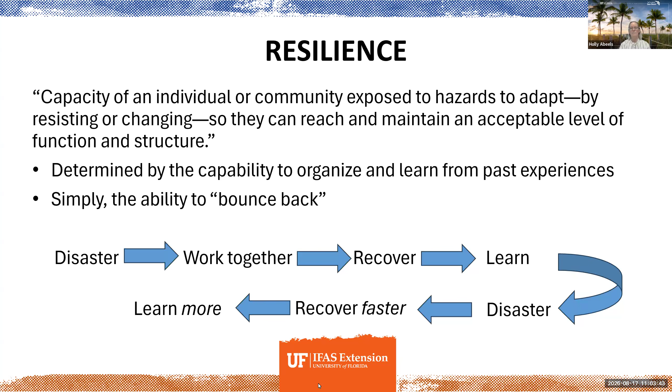So we've already learned a lot in this series about ways that you at home can adapt and be more resilient, and also how your community can be more resilient. And Eban today will be talking quite a bit about that community portion, as well as some of that individual resilience. Thanks so much, Holly.

So I wanted to start out kind of building off of this great series that you all have put together, really talking kind of what are we talking about in the scope of community resilience and individual resilience here. When we think about community resilience as it pertains to gray infrastructure and stormwater management, we think about sort of the roads and bridges that help us be able to move around in our communities. We think about functioning and drainage of our stormwater system so that it's able to move water out so that we don't have flooding. But there's also sort of the individual resilience as well.

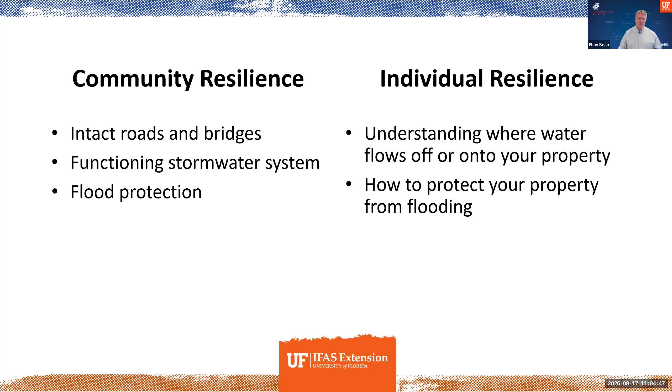And this is really understanding sort of from your own property perspective, how water flows onto or off of your property, and also how to protect sort of your property from flooding whenever we do have sort of large rain events.

So to start off kind of going into this whole aspect of gray infrastructure, really thinking about sort of the basics here, and some of you may be kind of familiar with some of these concepts, but looking at sort of what happens when we change an area from basically undeveloped, maybe it's forested, maybe it's an ag field, and then making that into an urbanized or developed area. There's several things that really kind of occur.

And just to point out here, the graph that I'm showing here, the blue bars represent the rainfall that happens during what we call a center weighted storm, but basically it gets more and more intense and then tapers off, like many of the storms that we end up having. And then the lines that are shown there for undeveloped and urbanized are the rate and sort of the amount of runoff that occur. So the shift from the undeveloped to urbanized is what we kind of want to look at here. And what you should see, hopefully, is a couple of things.

Number one, there's a greater total runoff volume from the urbanized compared to the undeveloped response to that rainfall. There's also a shorter time to the peaks. So if you look at where the undeveloped and urbanized peaks kind of happen, the urbanized peak happens much quicker after the peak rainfall than the undeveloped. And that's due to the stormwater infrastructure optimizing the conveyance and movement of water from where it becomes runoff to the downstream area. And so this is where we get the term sort of flashier or flash floods that occur.

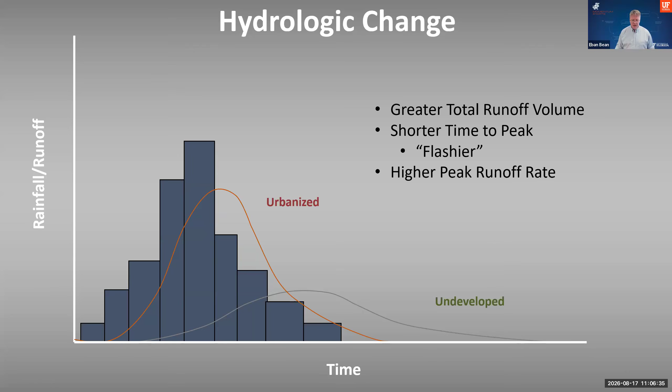And then there's an overall higher peak runoff rate. And so that can introduce risks of flooding downstream, particularly if many areas are contributing at once. And so I mentioned before that a lot of our drainage network is essentially about getting water from where it becomes runoff downstream and offsite.

And we have really kind of taken that approach really up until kind of the 70s and 80s, that it was really about just getting that water offsite as quickly as possible so that we're not flooding ourselves and our own property. But municipalities built these storm sewer systems to drain usually to the nearest creek, river, or wetland or pond so that we could not have flooding on our property.

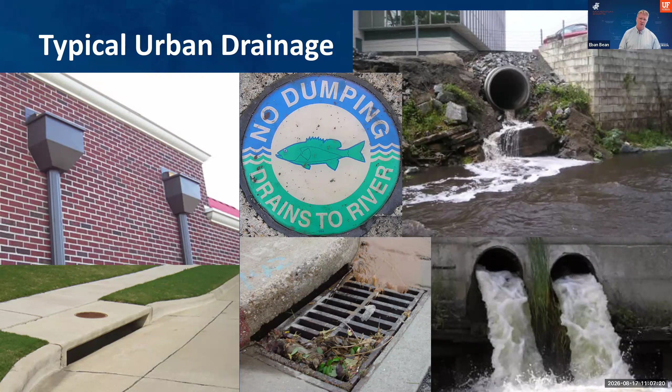And you can see sort of the different elements in the urban area. We have scuppers on the side of buildings. We have storm drains along the side of streets. And then we have the pipes where they discharge into those downstream waters.

So around the 70s and 80s, we realized that all of that water contributing downstream as quickly as possible and flooding out people downstream is maybe not the best or most responsible way to manage stormwater runoff. And so along came an approach called peak control.

And this was essentially the idea that instead of just allowing all that increased amount of runoff to go off-site and downstream, we should capture and control the release of that stormwater runoff so that it is comparable in some ways to what happened before the area was developed. So essentially, with detention, we basically have these ponds where runoff is directed, fills up a pond, and then slowly discharges it downstream. So it reduces the peak rate.

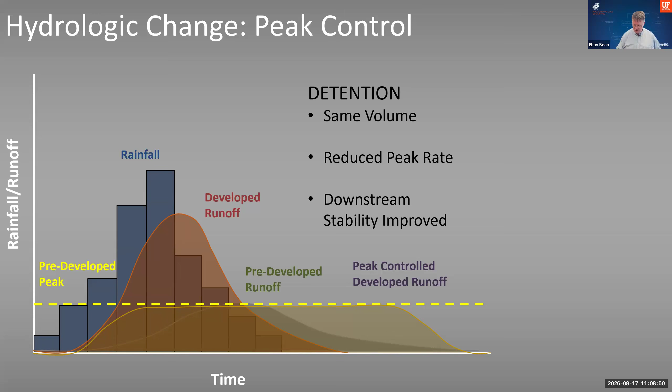It's the same amount of volume, essentially, that goes downstream, but it also prevents downstream erosion or reduces the likelihood of that. And so this yellow dashed line indicates that pre-developed runoff peak. And so what we've done with the modified or peak controlled runoff is stretch that out. And so you can see that orangish yellow at the bottom that's just hugging underneath that yellow dotted line.

The water quantity is not the only issue with stormwater runoff that we have to deal with. I'm sure many of you are aware of the impacts of water quality from stormwater runoff. A lot of our developed areas, like our roadways, contribute metals, polyaromatic hydrocarbons. Our parking lots and other impervious surfaces can contribute organic debris, sediments, and nitrogen that gets deposited just from the atmosphere. Then we also have management of landscapes. If we're not applying nutrients properly, then those can be sources into our stormwater system and move downstream.

They are essentially walking, barking point sources of pollution. And so it's important to pick up after our pets to prevent the introduction of nutrients as well as pathogens into the flow path that contributes to our water bodies.

And if we look at the impacts of chemicals or pollutants in stormwater runoff and the overall quantity of runoff that's coming off the landscape, we can have some pretty significant impacts. Everything from algal blooms that contribute to fish kills to downstream flooding that is still a significant occurrence in many areas.

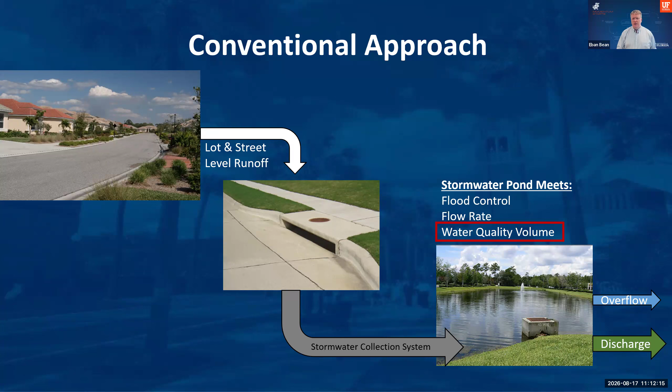It also reduces the flow rate and reduces the risk of that erosion. And there's also a water quality volume where there is credit for the treatment and removal of nutrients. One of the big aspects, though, of water quality volume is that the intentions behind this were good. However, in Florida, we found that these stormwater ponds are not necessarily providing the amount of treatment that they are credited with.

Now, there's a reason that phosphorus is better removed than nitrogen. One of the aspects is that stormwater ponds in this water quality credit were based on stormwater ponds being able to remove sediments. So if you think about water that's moving and has sand or silts or other particles in it, it's moving quickly. It can carry a lot of sediments with it because of that momentum. When it then goes into a pond, the velocity stops and those particles can settle out pretty quickly from the suspension. And so you can get pretty effective removal of sediments.

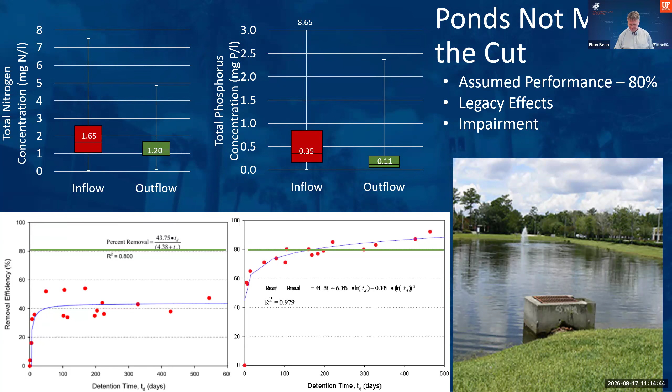And this has created a stormwater legacy, right? Where we put in this stormwater infrastructure, it's credited to treat our water quality. And so that's kind of set in stone. It's hard to go back and correct or fix that, particularly when there's limited land in these areas that have been developed. There's limited areas to work with to improve that. And this is where low impact development and green stormwater infrastructure come into play.

And if you're not familiar with these terms, I want to give you some basic definitions to think about them. If you have heard of them before, you might think of them as the same thing. But I think these definitions really distinguish them from each other in how they apply to different phases of the development process.

So low impact development is a comprehensive site planning and design strategy for maintaining the pre-development hydrologic regime. So basically trying to have the same or similar response to rain events for a site before and after it is developed. And this also focuses on mitigating the pollutants from land development using distributed structural and non-structural design techniques. But the goals here are to avoid and minimize the runoff being produced from the site. So a lot of this is looking at how do we minimize the impervious, and then how do we reduce or infiltrate any runoff from those impervious areas very close by, just by disconnecting impervious area.

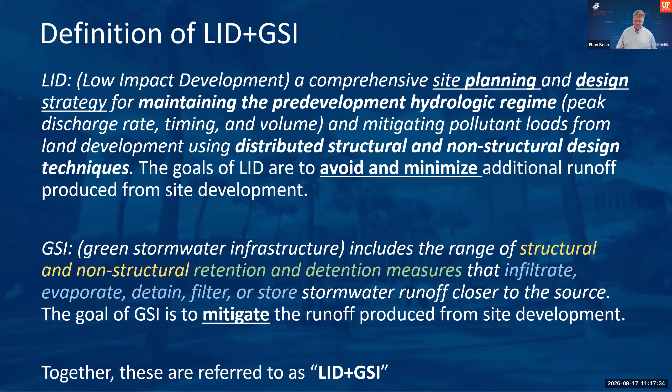I really like this figure. It's from a manual from the University of Arkansas, and I think Carrie can put a link in the chat to where you can find this manual.

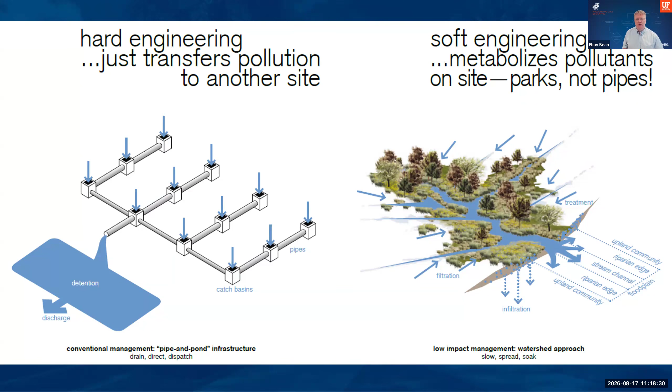But one, I think it provides a really great comparison between our approaches, how they've evolved from initially being this hard engineering pipe and pond, just relying on concrete structures and then detention basins and then discharging, to more of a holistic integrated LID GSI approach where we really try to think about how do we integrate natural processes into the built environment and provide filtration, infiltration, and treatment of stormwater along its flow path.

This is the manual I was talking about. I really like this. It's just such a great graphical illustration. I'm a stormwater nerd, and my family is not very interested in the things that I find really exciting. But this is a manual that I think of as the coffee table book of stormwater management. It's just so graphical.

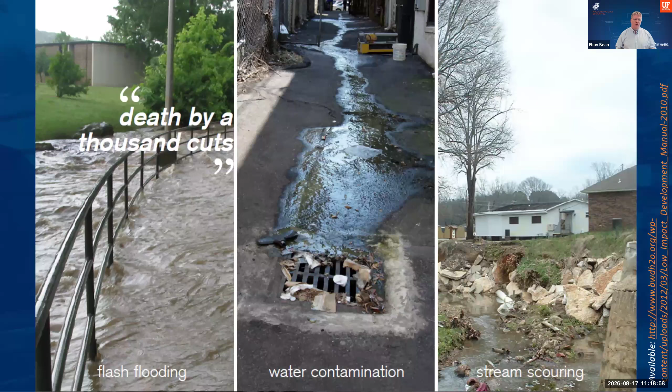It provides such a visual representation of a lot of the things that we're dealing with. And if you go to the link that's here or that Carrie provides, you can see some more excerpts of it. It's really fascinating. They do a great job of kind of laying out some of these concepts and really providing an easy way to understand these.

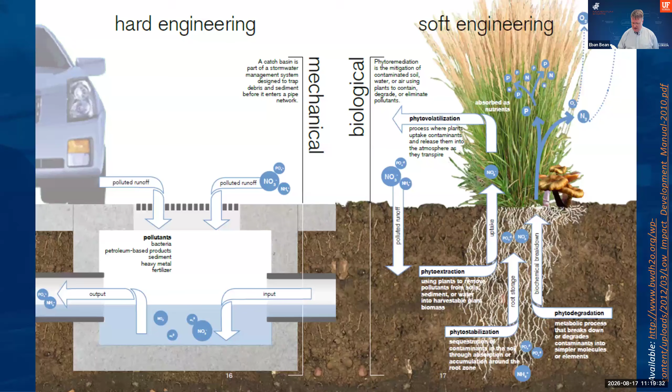Really even breaking down a lot of these more complex processes of how do pollutants come in, what pollutants are coming in, inputs and outputs, how do plants approach that and help to filter it. And then it brings it all together into some of these examples of how these processes can be integrated into the modern built environment.

And so I kind of alluded to this a little earlier, but this kind of graphic shows really the transition from site planning to mitigating here, where we talk about, at the front end, the LID takes place with avoiding runoff. So what this means is essentially identifying the areas on the site that are valuable natural infrastructure to preserve those so that we can retain those hydrologic features and retain that large scale hydrologic performance.

Now, with development, there are some areas that do have to be converted to impervious surfaces for different types of structures and so forth. But with LID, we look to minimize the generation of that runoff, limiting the footprint, disconnecting impervious surfaces. So you don't have a rooftop flow draining to a gutter that goes onto a driveway, into a street, and then into the storm drain. It can run off into the landscape, whether that's turf or some other type of natural area, so that it is infiltrating and being treated on site rather than just contributing downstream.

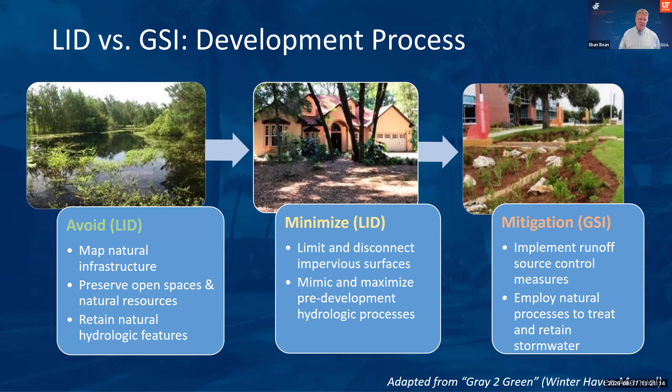And then again, anything that's not able to be addressed or mitigated is addressed by green stormwater infrastructure, by implementing these source controls and really looking at how do we integrate these natural processes to treat stormwater runoff.

So going in depth a little bit more with this whole avoid aspect and the planning, it really starts at the planning stage. To go in a little bit more detail here, number one is preserving those open spaces and natural areas as much as possible. With development, you're not going to be able to preserve it all, but there is value to preserving as much of that as possible. Maximizing the retention of native forests and preserving those permeable native soils that really promote infiltration and filtration of that water as it goes into the ground.

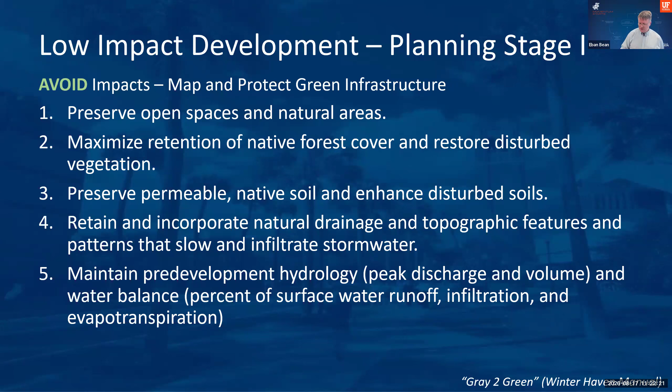You also want to incorporate those natural flow paths and protect the topographic features that essentially slow down water as it moves across a landscape so that it's not just moving from one point to the next as efficiently as possible. Slowing it down also allows for it to be filtered and infiltrate into the ground. And then again, we're trying to reach this aspect of maintaining that pre-development hydrology, mitigating those peak discharges and volumes, and so forth.

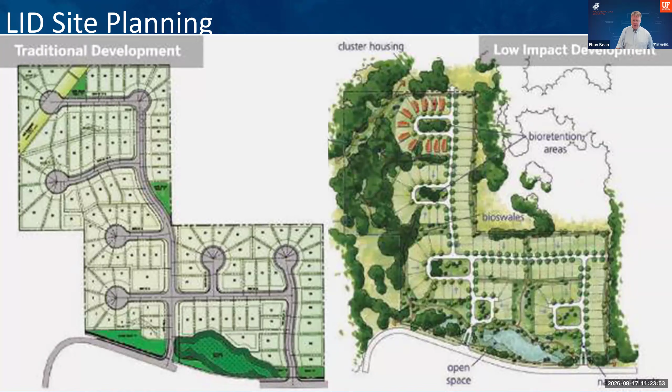Another example of this is a site that was designed for a neighborhood called Restoration. And this was in a plan for East Central Florida. They started out initially with the plan on the left, and there were a lot of wetlands and forest that were going to be impacted. And then they came back and were encouraged to try to take a more low impact development approach and limit the amount of impacts on the area to the west side or the left side of the map here.

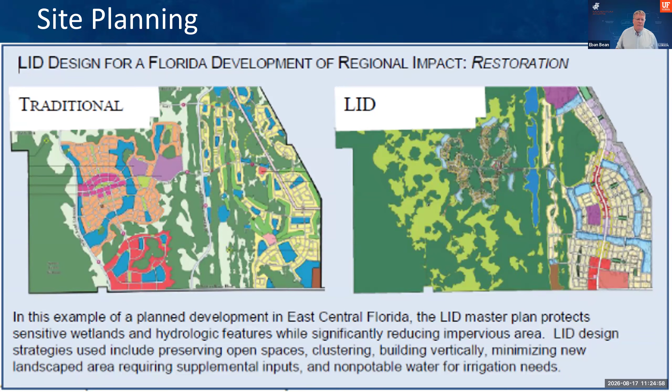And they were able to basically cluster all of the development, same amount of square footage and area, in the right-hand side here, basically limiting the amount of imperviousness, reducing drive times, increasing the building vertically, and reducing the amount of urban landscape areas that needed to be managed on a regular basis. So as we go into phase two, the second stage is now minimizing.

How do we basically make the project fit the site? A lot of times we see that we want the site to fit the project. We have a project in mind and we force it onto the site. It's where you see sites that are cleared and mass grading done where they recontour the entire site. We'd like to move away from that and really make use of what the existing topography of the site is and what those features are.

So this involves minimizing and disconnecting those impervious surfaces, trying to control runoff at the source, using those small distributed hydrologic controls. These are green stormwater infrastructure I'll talk about more in detail in a minute. Looking at more redundant runoff controls, so not just relying on one type of practice, but multiple ones. Really thinking about the whole water cycle, so maximizing infiltration, evapotranspiration, the filtration and storage of stormwater throughout the site.

We also want to reduce our over-reliance on traditional stormwater conveyance and pond technologies. We want to slow the water down by creating a rough hydrologic landscape so that water doesn't move super quickly. That rough hydrologic landscape allows water to infiltrate and be filtered. And then employing natural processes for water quality improvement.

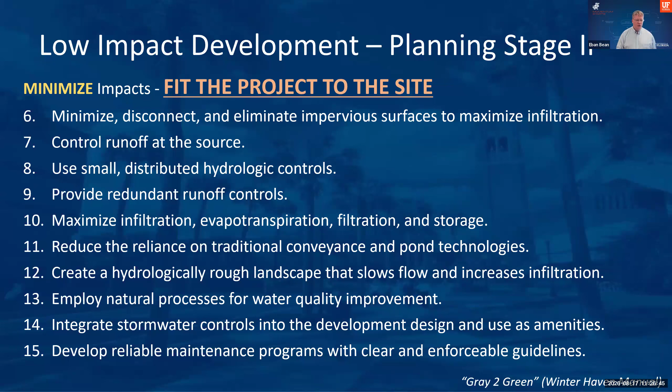And then building off of that, integrating those stormwater controls into the development design as an amenity. A lot of times these areas provide a lot of value, whether it's shade trees from natural areas that are preserved or recreational areas. And then we're developing reliable maintenance programs that ensure that these practices continue to work and continue to provide their services.

So when we think about limiting imperviousness, this is really about how do we reduce the amount of impervious cover. Some of that is looking at narrower streets and using swales. Narrower streets automatically slow the velocity that people are willing to drive, because if you've got a smaller space, you don't want to be flying down and having somebody come within a couple feet of your car. You naturally want to go a little bit slower.

We can reduce the length of driveways, particularly if we're clustering homes together. It doesn't seem odd to have shorter driveways when we're in a tighter community. And then there's the aspect of just reducing the size of lots. And instead of only going with single story, we can go to multi-story to reduce the housing footprint.

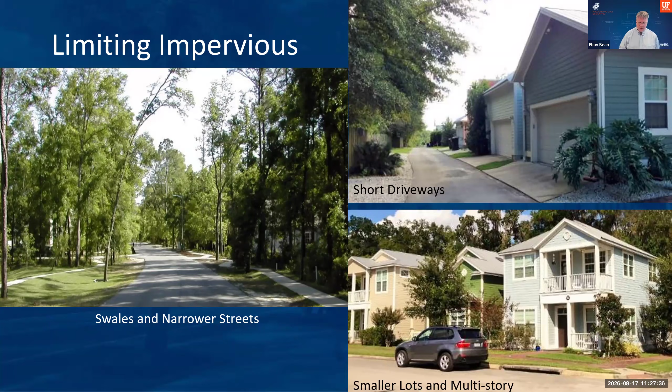When we think about disconnecting imperviousness, this is really about how do we put spaces adjacent to where stormwater runoff is generated, like in a parking lot or on a roadway, where that water can run off, build up, infiltrate, and potentially, if there's enough water, then discharge somewhere else. But this allows for pre-treatment of that water that is coming off of those roadways.

And I'll talk about this a little bit later on, but there's an aspect of what's called the first flush, that first little amount of water that comes from these afternoon thunderstorms. Most of the pollutants that come off of our impervious surfaces are washed off in that first amount of rainfall. Usually we say it's about the first inch. So if we can capture and infiltrate that first inch, we can really reduce the amount of water quality pollutants that are going downstream.

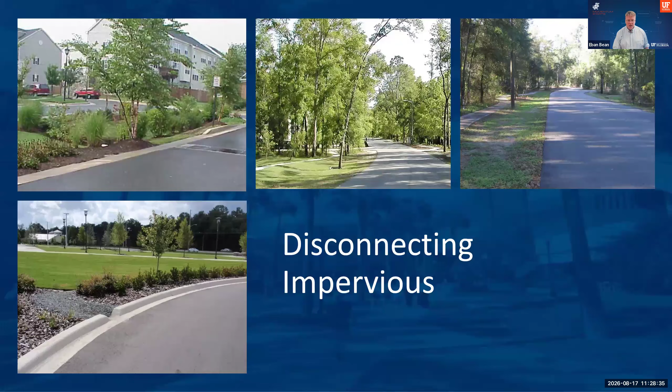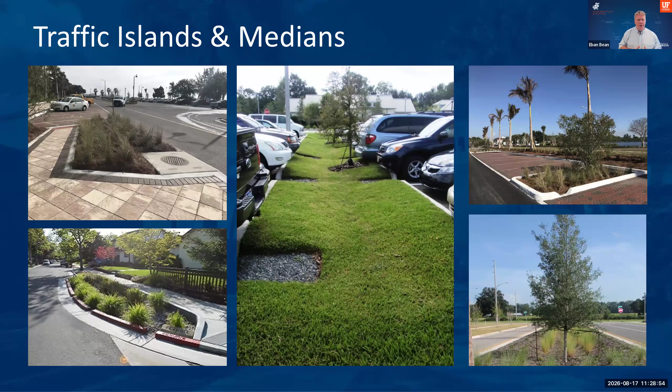Other opportunities to disconnect imperviousness are to make the traffic islands, instead of mounds, depressed so that they can receive runoff from the adjacent parking areas and roadways. This allows that water to build up in these open areas of the parking lot and then infiltrate into the ground.

And then moving on to phase 3. So once we've basically tried to mitigate, avoid and minimize the runoff from the site plan as much as possible, then we look for where we can incorporate green stormwater infrastructure into the landscape to mitigate the runoff that could not be avoided or minimized.

And there's a lot of different names up here. I'm going to go over these in a little bit more detail, but things like green roofs, pervious paving, rain gardens or bioretention, wetlands. Stormwater ponds are a type of green infrastructure. It provides its own types of benefits, mostly on flood control, okay?

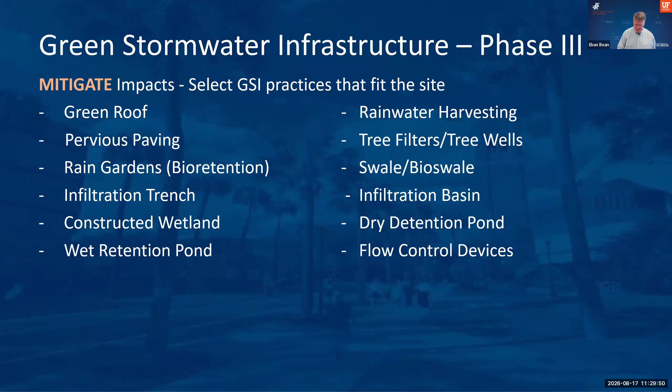But it is a type of green infrastructure. We also have things such as cisterns and rainwater harvesting, tree filters or tree wells, and other types of practices. So what does the conventional kind of orientation or configuration look like within an LID GSI approach?

Well, we still have the issue when we have development of having to mitigate or control for flood. That flood control is not going away, right? We're still going to have to protect property and the public from the risk of flooding when we add imperviousness to an area.

Instead of that water essentially going off of the individual lots and then directly into the storm drain, we look to capture that water, infiltrate it, treat it before it then either overflows or maybe it's being filtered as it moves along. That water quality aspect is happening upstream of it entering the stormwater collection system. And so this looks like having rain gardens and cisterns and other smaller practices within the urban landscape, right?

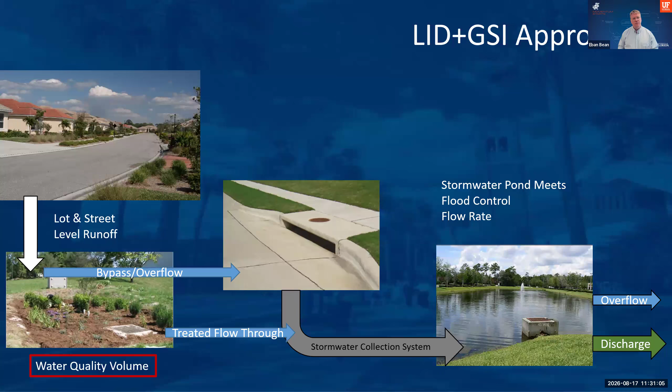So instead of the stormwater pond being relied upon for flood control and water quality, it's really just being relied on for flood control, and our water quality is really being addressed in the landscape. So let's look at some of these practices, and some of these you may be surprised to be somewhat familiar with. So cisterns, these are an extremely old technology. They've been used for thousands of years.

In many places, they were being used for water supply. And here they can kind of offset some of our water uses, but really as a way of capturing runoff and not letting it discharge off site. So these cisterns can either be above ground or buried below ground. And they essentially fill up during rainstorms. And usually it's getting direct runoff from a rooftop.

And then the recovery of that volume is done through non-potable use, you're not consuming this water, but it's used through irrigation of the landscape, maybe vehicle washing or flushing of toilets. Now, if you have a rain barrel or you've seen one, those are essentially just small cisterns that are scaled down to maybe an individual roof downspout.

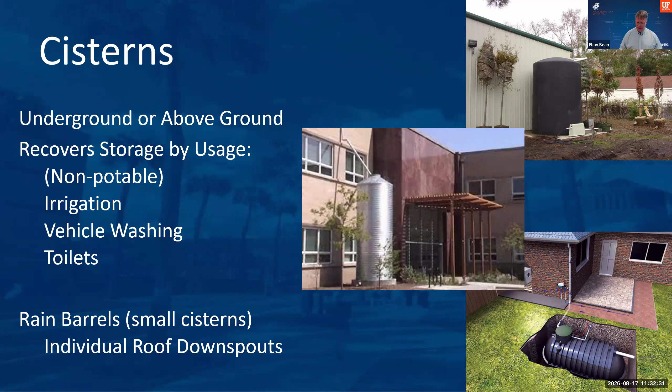The key here with the operation of cisterns, though, is that it only can reduce the amount of runoff that it has storage available for. So it's important that in between rain events, it's able to draw down or recover that volume so that it has enough capacity when the next rainstorm happens. So it's important to make sure you're using that water on a regular basis.

Stormwater planters are another type of technology. These basically reduce runoff and they treat the runoff as well. I'll talk a little bit more in detail about what bioretention is, but this is sort of bioretention in a box. A lot of times these are right up against the building, between the building and the sidewalk rather than between the sidewalk and the street. So it's almost like integrated into the building infrastructure in some ways. But it can definitely take that roof downspout, the water that comes down the downspout.

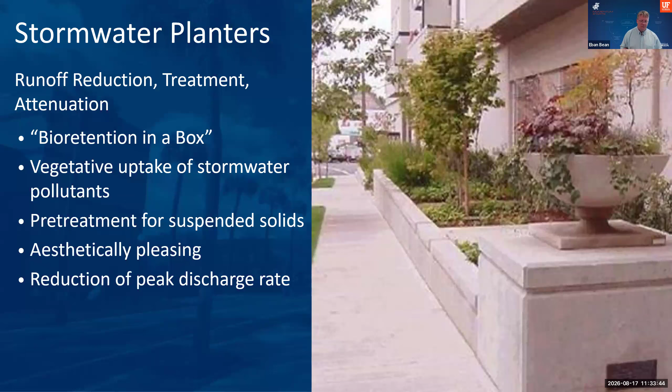And these basically recover the volume through vegetation evapotranspirating, or basically taking up that water and using it as it fills up that area. And it's very effective for removing suspended solids that might clog other things downstream. If you weren't using this as a stormwater practice, this might just look like pretty landscaping. So these can be fairly aesthetically pleasing. We're just, with some additional thought into the design, incorporating this function of treatment and runoff reduction. So it can really provide some of those functions.

Permeable pavements. These are one of my favorite practices. When I got started in this field, oh gosh, maybe 20 years ago, I did some of my first research on this. And permeable pavements are really interesting because unlike the conventional types of pavements, it allows water to drain through this material. So you have porous asphalt and pervious concrete and pervious pavers or concrete pavers.

And while the surface is a little bit different, the composition or the profile is pretty similar across those. You essentially have this pervious surface that allows water to quickly infiltrate whenever we have a rain event. And then it flows in and fills up these rock layers underneath that are about 40% void space. And so water moves in very quickly, fills this up, and then in between storm events, it slowly infiltrates into the soils below.

Now, if we don't have great soils, we can put in an underdrain to allow that water to move downstream into the stormwater system. But typically here in Florida with our well-drained soils, if we have enough separation from the water table, that water will just infiltrate into the ground below.

Now, one of my favorite analogies of being able to tell the difference between these and the conventional asphalt and concrete: porous asphalt, it's really difficult to be able to see what the difference is. You really got to know what you're looking for to be able to see it. But pervious concrete, the best way to understand what that looks like is it's essentially a Rice Krispie treat. And if you think about how Rice Krispie treats are made, it has a very similar structure.

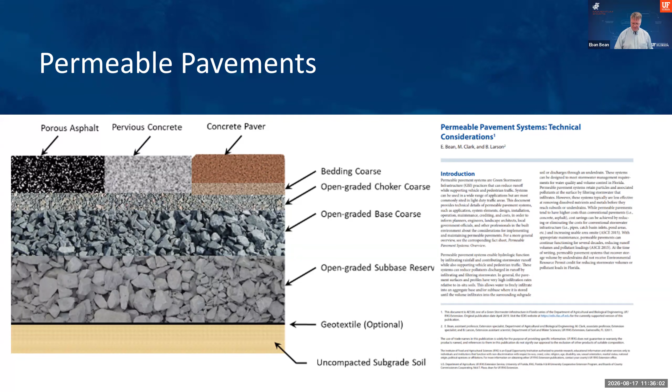Moving on to bioretention or rain gardens, the real difference between bioretention and rain gardens is that an engineer designs a bioretention to meet certain performance standards. A rain garden can be basically constructed by anybody in their yard on the weekend very quickly. Essentially, these are vegetated depressional areas where stormwater runoff is collected and allowed to infiltrate either into the ground or taken away with an underdrain and directed into the storm drain system. Either way, the bioretention media, the soil there and the plants help to improve the water quality, filtering out particles and pollutants as the water goes into it.

Now, we typically have a depth of about 9 to 12 inches, and we don't want to go much deeper than that because we want this to be able to drain within about 24 hours. You don't want these becoming ponds that maybe attract mosquitoes or anything like that. So ensuring that we don't have too deep of water and we have good conditions ensures that these will drain within that amount of time.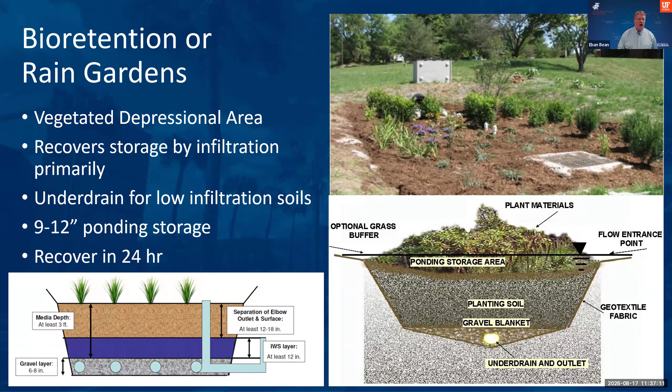Infiltration trenches or dry wells are another practice. If you have a septic system and you're familiar with how those work, they're not too different from essentially the drain field. We route the stormwater into a long pipe that is pervious or permeable and allows water to drain out to the sides. And there's rock around that to keep sediments from the surrounding area from migrating in and clogging. That water flows into that pipe, flows laterally, fills up the stone, and then slowly drains into the soil around it. Really important that we don't have sediments coming into these because sediments can clog this.

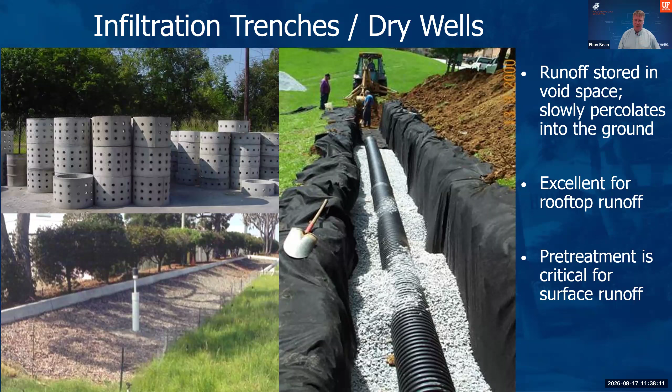So really what we're looking at here is a lot of times roof downspouts. And if there's any type of leaves or anything, we've got a screen in there to keep that out of the pipes. So it's pretty critical to have pre-treatment.

Then swales are great. They provide a lot of function. They provide conveyance, moving water from one location to the other, but they also can reduce the amount of runoff by infiltrating through the soils. And even if those soils are not very permeable, the flow through the vegetation can help with treatment of the water quality from runoff.

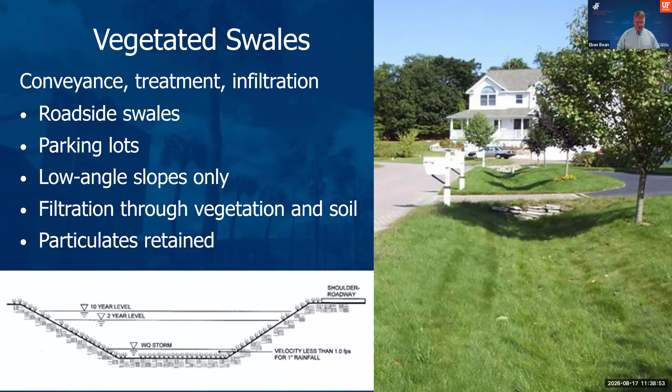And so you see these on the roadsides. You'll see them adjacent to parking lots. They typically have very low angle slopes, so they're not very steep. They're fairly shallow, easy to mow and maintain, and they do a great job with retaining sediments.

Now, a more mechanical or engineered system that I'm including are what are called nutrient separating baffle boxes. They're not necessarily using soil and the natural system, but they do provide some pretty important functions in a situation where we don't really have another option to do the same thing. You have stormwater coming in, and usually you put this in the middle of a stormwater pipe.

So you have water that's coming in, you take out that section, put in this box, and it allows for sediment to drop out of suspension behind these different baffles at the bottom. So you see sediment all along the bottom there. And then it has a screen at the top to capture any kind of floating debris, like vegetation that can have nutrients in it, and other debris that can be transported downstream.

And so then you open these hatches to maintain it. You take out what's on the screen, then you suck out the sediment, and then it's ready to go again. So it's really in a very small footprint, and it removes debris, sediment, particulates, oils, and grease, and it's pretty straightforward to maintain.

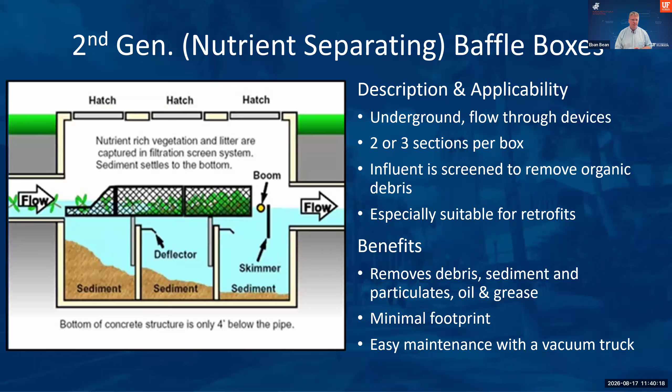Now, in thinking about which options do we go with, a lot of times when engineers are thinking about what kind of treatment do we want, we often want to think about what are the processes, or what do we want the processes to be to achieve the nutrient removal.

When we think about nitrogen, I talked a little bit about this before, where about half of nitrogen is in a particulate form. So the sediment, settleable, and suspended fractions here on this graph on the left, those particulates can kind of fall out. Think of that as being like leaves and other sticks and debris.

There's nitrogen in there. But then there's the dissolved fraction of nitrogen that is the green here, the organic, the NH4, which is ammonium. And then we have nitrate and nitrite at the top. And so oftentimes with our GSI, we want to facilitate the right processes to remove or transform the types of nitrogen or the types of pollutant that we have to effectively treat the water.

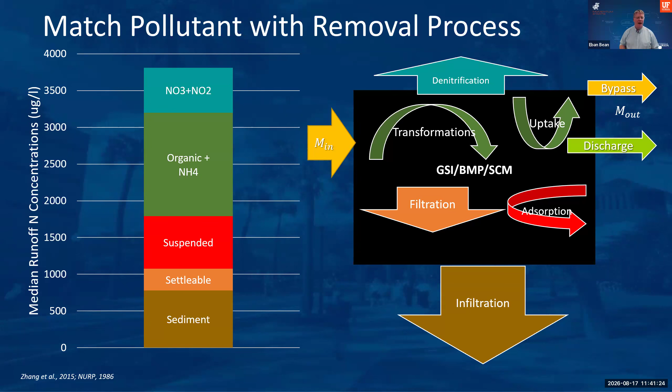And so this is another figure from that University of Arkansas manual. One way to think about this is that there's a range of options along a mechanical to biological axis, and then there is an axis of increasing level of volume reduction, right? So we go from very mechanical on the left, where we're looking at underground detention, oversized pipe, flow control, really just looking at the

volume control and how water is moving through, all the way till we start seeing more biological functions integrated into these practices. Things like vegetated roofs or green roofs, even vegetated walls, permeable pavements, rain gardens, infiltration basins, where we're starting to integrate much more of the biological functions.

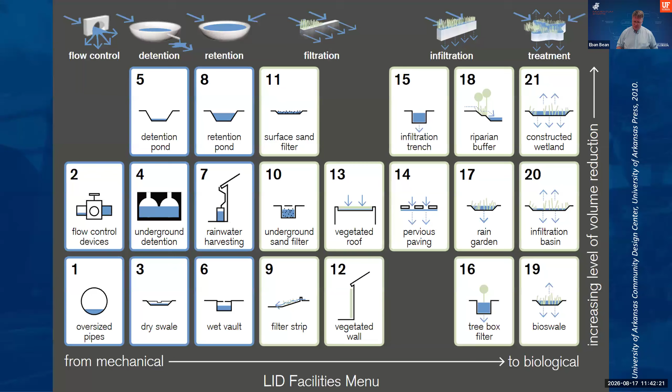When we think about some examples where this has been implemented fairly successfully, I've used this example for a long time. And full disclosure, this is not in Florida, but I think it provides a really great example of where they really went back and thought about, what can we actually do here with this site, and what are our options to still maintain what we have as a vision for this site, but also integrate stormwater management more effectively into the site.

And so on the left, you see this is a townhome development, Winterberry Road. And initially, they had essentially done the conventional approach where you have conventional pavement. The runoff went into these storm drains or catch basins that were then piped from all over the site into two stormwater ponds there in the top center and the upper right.

But what they did when they went back and revisited this was they started thinking about, well, all that pavement, maybe it doesn't need to be impervious. We could probably use porous pavement. And these catch basins, what if we use swales instead of stormwater pipes and tried to infiltrate this, and incorporating some drainage infrastructure?

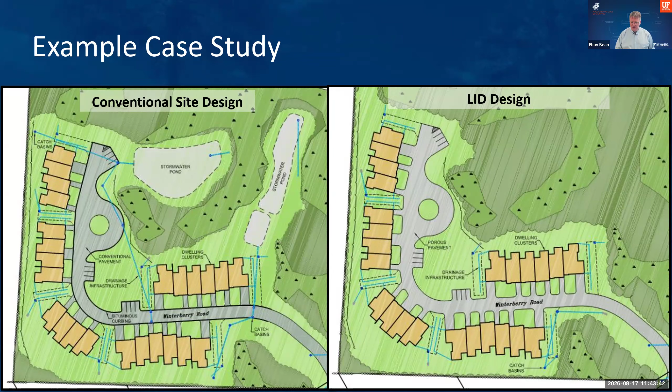And what they were able to do with this redesign, we don't always think about the indirect benefits of reducing the amount of runoff. For example, permeable pavement is more expensive than conventional pavement. But if you think of it just in that context, oh, the permeable pavement's more expensive directly 1 square foot per 1 square foot compared to conventional pavement, you're not really seeing the big picture.

By redesigning this and accounting for the reduced imperviousness, they were able to reduce 1,600 feet of curbing, eliminate 785 feet of storm pipe, remove 8 catch basins. They didn't have to construct and buy the land and grade those 2 detention basins. They eliminated 2 outlet control structures, and they eliminated 1.3 acres of land clearing. So on a $4.4 million project, it may not seem like much, but they got a lot more function out of this and saved $50,000 on the overall project.

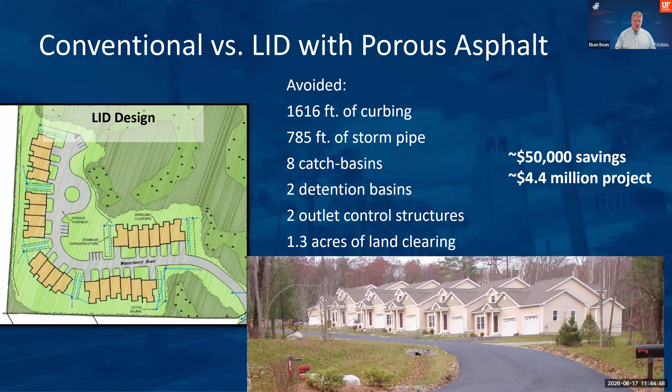So some things to think about with the summary here. Number one, when we think about LID and GSI, getting that implemented into a site really starts at the beginning. We've got to think about the site layout. How do we avoid and minimize the stormwater runoff that's going to be generated? How can we disconnect the impervious cover? Are there ways that we can eliminate curbs and gutters?

In many communities, there's a requirement for curb and gutters, which essentially prevents the use of swales. So you're basically forcing the roadways to be directly connected into the stormwater system. There's some benefits to that, but it's not necessarily one-size-fits-all, particularly in smaller neighborhood developments. And then using a compact design to reduce the footprint and area of disturbance. And then finally, really thinking about how do we make the project fit the site?

How can we modify the project and make the project flexible so that it fits what the site offers rather than the opposite there?

I want to go over a few resources if you're interested in this and want to learn more. First, we've got a video series that myself and Dr. Mark Clark put together. There should be a link in the chat that I think Carrie's going to put there. We go in depth on these different types of green stormwater infrastructure and some of the LID practices, really talking about it in a very simple, down-to-earth, easy to understand way.

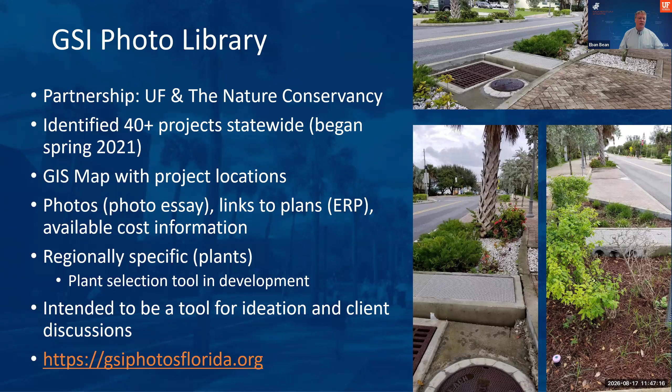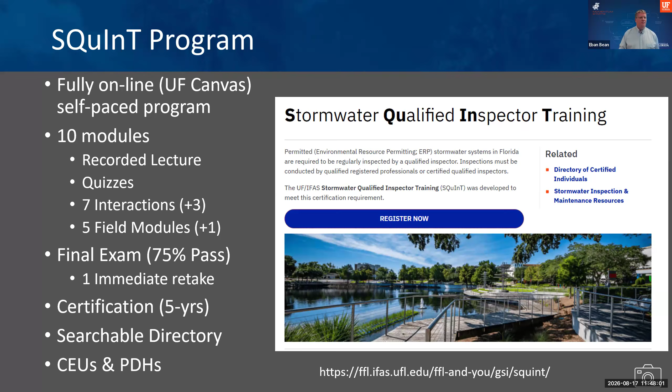It's certification for 5 years, and you have your name in a searchable directory. If you're a licensed professional, it also counts towards CEUs and PDHs. And so the site you can see here, I think Carrie's probably going to put that link into the chat as well too.

Some other sources that we also have for doing inspections are some checklists. So these are really good for kind of guiding you through that process. How do we evaluate and determine if maintenance is needed on these different types of practices? This kind of shows the inspection checklist for bioretention. And with each of these, one of the things we have is a whole gallery of photos for different types of issues that you can easily link to and see those.

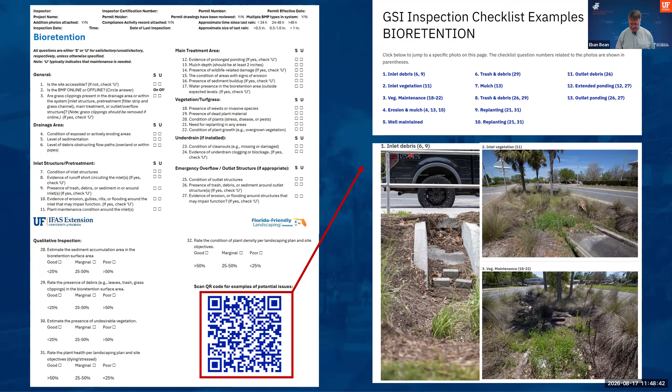I want to plug or just mention FDEP has a great green stormwater infrastructure website with lots of resources, and some of the things that we produced are there as well. One of the things that we've worked on is a code audit tool for local governments. This is actually based on something that Wisconsin Sea Grant did, and Center for Watershed Protection also has a similar tool. But we've worked with close to 10 communities around Florida to kind of audit their codes to identify codes that either restrict or prohibit use of LID or green stormwater infrastructure.

And this is something where we've seen some progress. For example, I believe it's Volusia County that went through the process, updated their codes, and now they have some incentives where developers are actually using these incentives, using the LID GSI practices, and integrating them into their development within the county. So we're excited to see that basically translating into implementation.

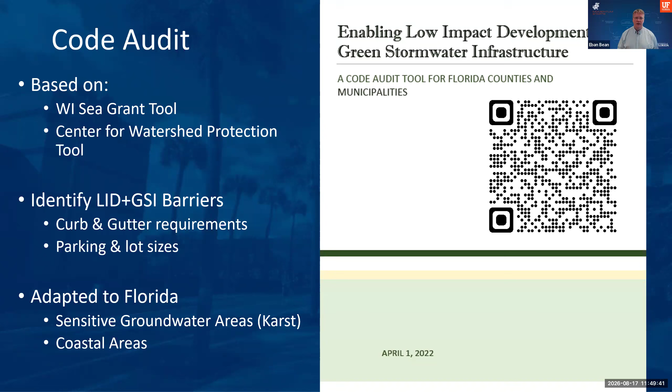And that process essentially goes through developing a core team, planning, and really understanding what the issues and goals are for the community. And then there's a spreadsheet tool that kind of walks you through each of these questions. And then the audit, once it's done, identifies those areas where maybe communities need to look at revising or updating their codes to enable better stormwater management to be implemented in their communities. So I think there's a link there too.